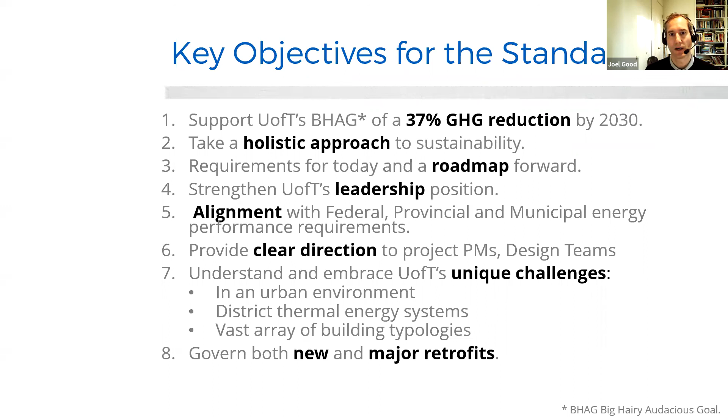And also maybe the most complicated part of it all is that we have, with the 3 campuses, with the size of the University of Toronto, a vast array of building typologies. So we're not talking about just lab buildings here, obviously. And we needed to govern both new and major retrofits. So it's not just for new construction, but also for the existing building stock. And I'll show you a little bit about that now.

So here's a breakdown roughly of the archetypes by floor area that we're talking about across the campus. So you can see that we're predominantly in admin and academic buildings up to almost 600,000 square meters. But when you look at wet labs and dry labs, making up another almost the same amount, right? Or maybe even a little bit more, up to 600,000 square meters of existing lab space already on campus. So this is a highly focused research university, as many of you know, and as such, there's a lot of lab space.

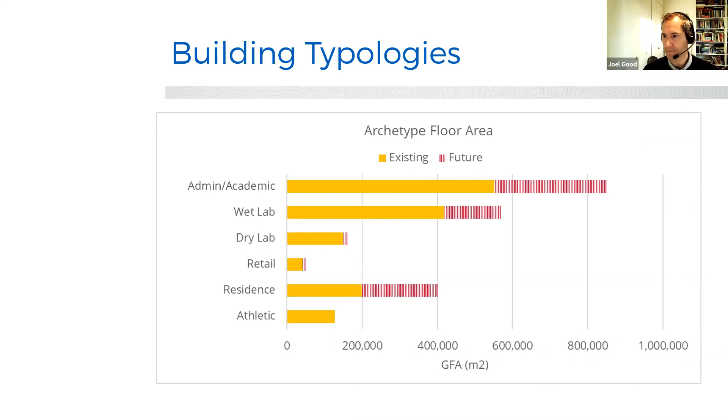Here you can also see in red the future planning. So significant growth planned over the next 10 years, which is our target. Kind of target timeline was out to 2030, as I mentioned before. So big growth in academic wet labs and residences.

So how do we get there? So it's like any journey, it's one foot in front of the other. So step by step. The first thing we wanted to do was establish some context and benchmarks to the energy. So like I mentioned, let's look around at what else we need to fulfill as far as federal, municipal, local requirements, and then come up with a set of goals and metrics that would meet those overall goals that I just discussed with you.

We wanted also to be very clear about investigating a set of performance pathways. So we don't want to just come up with some pie in the sky metrics, some that we have really no way of helping design teams achieve. So we wanted to come up with a series of performance pathways that would show a roadmap, basically, for design teams on how to achieve these goals. So we got very specific in that, and I'll share some of that work with you.

Okay, so first of all, the context. So some governing codes, as I've mentioned: the local codes that do govern are the Toronto Green Standard. There's buildings on campus that are going after LEED requirements, so obviously there's energy requirements and credits available for LEED. On campus, there's also pursuit of the CAGBC's zero carbon standard.

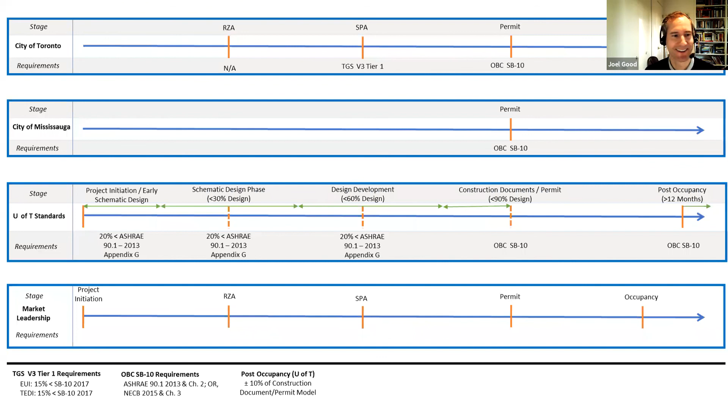And so we aligned a lot of these different timelines for the different submissions, just to see what it is that design teams are currently working towards, and what are their challenges, and then how we could line up and look for synergies across these to simplify the process when it came to our own energy requirements. I won't dwell too much on that. It's a bit of a tricky one to figure out.

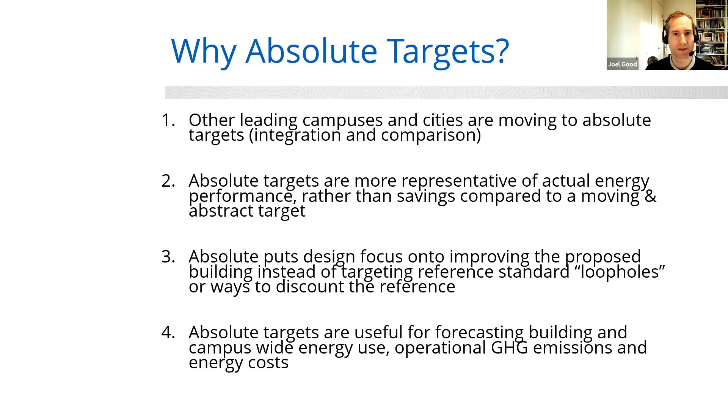So why is a relative target challenging at high performance? So this is kind of the flip side of that. So like I mentioned, the high performance proposed mechanical systems are compared to high performance reference systems. So things can show up on one project. So a VRF DOAS system can look 45% better than the LEED reference building, but only result in a 15% cost reduction. So when you're targeting LEED, which does refer to energy costs, it starts to complicate the issue, and the decisions aren't always being made for pure energy and carbon reasons. There are obviously reasons why costs should be brought in, but we wanted these targets to focus specifically on energy and carbon goals. Otherwise, we weren't going to be able to make that 37% by 2030, which was really the ultimate target here.

There's also limits on what energy conservation measures can be used for relative savings. So reducing domestic hot water usage is not an allowable conservation strategy. So when you're comparing against a reference building, the usage needs to be the same, or the way the building is used. So we also wanted to encourage the designers and the occupants and users of buildings to be able to incorporate reduction strategies too. And so we wanted those to be rewarded in the ultimate metrics too. No credit for Energy Star or high efficiency receptacle equipment. And as we know, and I'll show you a little bit later in some of our modeling results, labs have very high receptacle equipment loads. And so that was something we wanted to be able to also take credit for and show performance for.

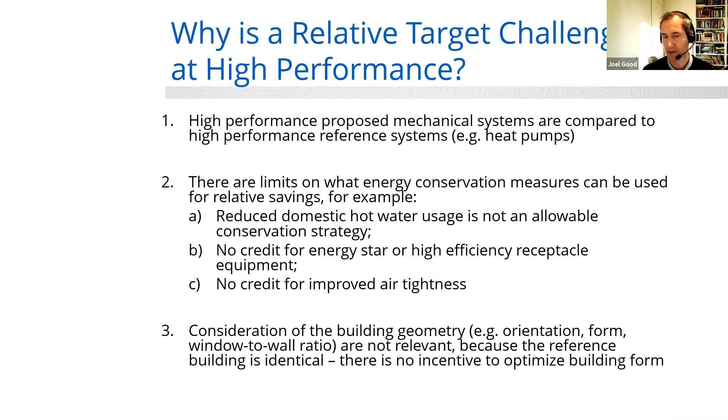No credit for improved air tightness too when you do a comparison like that. Often the reference building would be the same as the proposed building in those cases. So we wanted also airtight buildings to be rewarded as well. So the final one there is consideration of the building geometry. So when you create a reference building, you use the same shape of building. So you don't get benefit for choosing a building that's optimally oriented or optimally sized and geometry chosen for passive solar gains and that sort of thing. So we wanted also to take credit for that.

So looking back at that early concept work, we came up with a series of target metrics, and the target metrics that we chose for energy, these are mandatory metrics. We also came up with a series of what we called reported values, which were set to better establish current practices and performance, but were not meant to be mandatory yet. We just want to be tracking this information so that we can start to implement those in later stages.

So the mandatory requirements were, there's some kind of common ones here that you'll recognize: the energy use intensity, the greenhouse gas intensity, the heating TEDI or thermal energy demand intensity, and then we also incorporated a cooling thermal energy demand intensity too. The reported values that we were tracking are the enclosure R value, so an overall R value including all thermal breaks, and a whole building air tightness. We really want to be pushing buildings, new construction in particular, to be building with a consideration for a tight envelope.

And here's a quick look at what those metrics are like. We're not going to spend too much time. Hopefully you have an understanding of these, but basically the total energy use intensity, the TEUI, is the total site energy use over the floor area of the space. So it's kilowatt hours per square meter per year. Similarly, for the greenhouse gas intensity, it's the energy use times emissions factors based on what kind of source energy we're talking about: electricity, natural gas, etc.

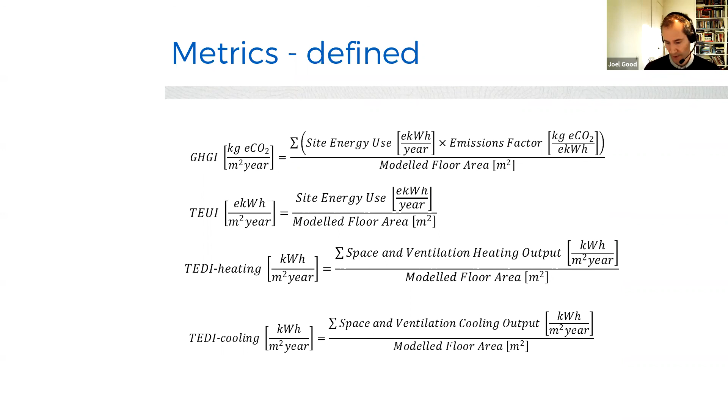And then the TEDI, the thermal energy demand intensity, is the summation of all the space and ventilation heating output. So just the heating requirements over the floor area. And then similarly, the cooling one is the ventilation cooling output over the modeled floor area. So those were our key metrics that were mandatory and targeted.

So we had the starting point, our baseline year, 1990. We have all the historical and current energy carbon performance of the campus, and we have a new construction goal set by the campus of 37% better. So we now know what we need to achieve, what we need to reduce. Here you can see new construction. There's no numbers here, obviously, but you can see relative sizing. We can see a target EUI that we needed to get to, and we knew that there was a gap that we needed to reduce. But most of the carbon is in the existing buildings.

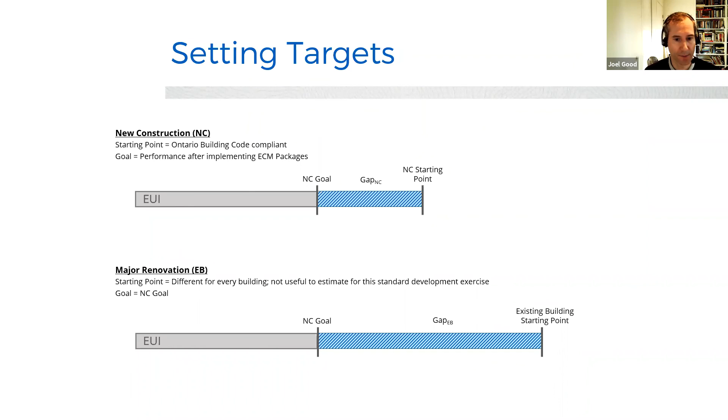So here are a series of models that we created to test our pathways to energy performance. We wanted to avoid using generic boxes in this exercise. So often when we're at this stage of planning, you'll just start to use basically cubes or simple box models, as they're called. But we wanted to capture some of the nuances of functional buildings on the campus. So therefore, we went through and picked some average, typical styles of buildings on the campus

and modeled those explicitly. So these buildings, the 6 archetypes you see here, each have a combination of uses similar to in real life. So there's no one building on campus that's just an admin building. They have other functions as well. Same with some of the lab buildings. There's always office space. There's always some other research work being done in them. And so we wanted to capture the nuances of that. And so we used real buildings, and you might recognize some of these structures.

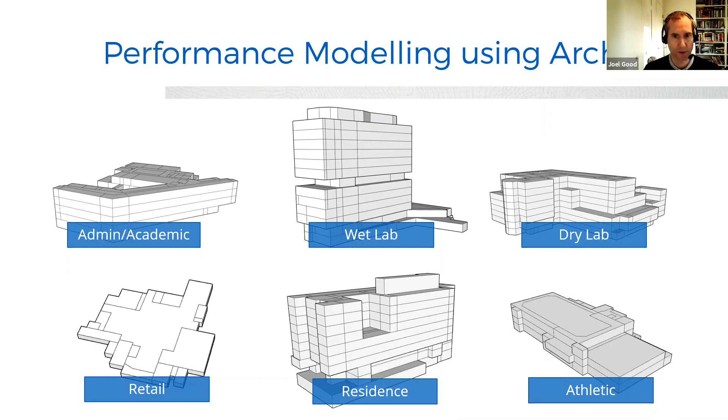So this is maybe a good point to talk about a nuance here between the lab buildings that we modeled. Wet labs are labs that have high air changes, basically are driven by air changes. So these are medicine, chemistry labs that have fume hoods and, like I said, are driven by air change. Whereas the dry lab buildings are really driven by equipment loads. So these are engineering, computer science, that sort of research lab, which are not so much driven by the air changes, more so by the electricity consumption.

And here's some of the early archetype decisions that we built into the models. So here you can see an example of the wet lab archetype. On the right, you can see the pie of the space breakdown, and this shows you that even a wet lab building is a third laboratory space, 14% lab support, a bit of office, some multi-purpose, corridors, stairs, storage. So what we wanted to do here is to have an honest representation of what we feel a lab building is and what they plan to be for the future. As many of you know, there's all sorts of flexibility in space design, and we wanted that to be represented in the models.

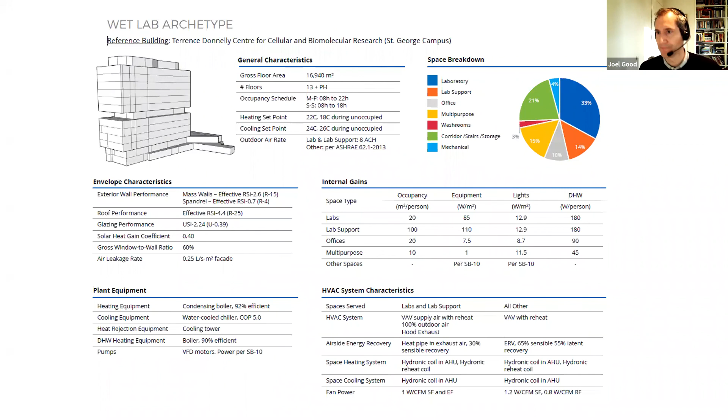And you can see here, I'm not going to go through every input we put in, and this isn't by any means all the input, but this was our first step at creating a baseline or typical University of Toronto wet lab. Pardon me. And here's an example of a dry lab building. So similar sort of breakdown into space types, maybe a little bit more on the office side here, but similar space usage, set points, and that sort of thing.

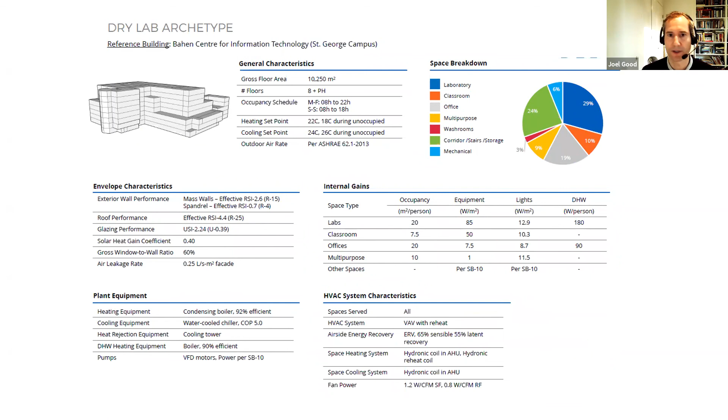So here is our first look at some energy output. So this was the first take at running each of those archetype models. You can see that the 2 labs I showed you are number 2 and 3 in the columns there, but we ran it for each of the building archetypes, trying to come up with something that was roughly code compliant and still tracking our key metrics. So you can see there that we have our total EUI in bold.

I'm not sure if my mouse shows up, but we're starting to get EUI numbers for typical buildings, and you can see, as expected, some of our high air change spaces, like the wet lab, have high EUIs. When you look at the energy performance, you can see that there's a lot of space heating required with those air changes, and a lot more fan power associated with those buildings too. We also tracked, as well as the EUI, the greenhouse gas intensity here, using emission factors local to the campuses, and some of the TEDI heating and cooling as well. These were our voluntary metrics, but we wanted to make sure that we were capturing those too.

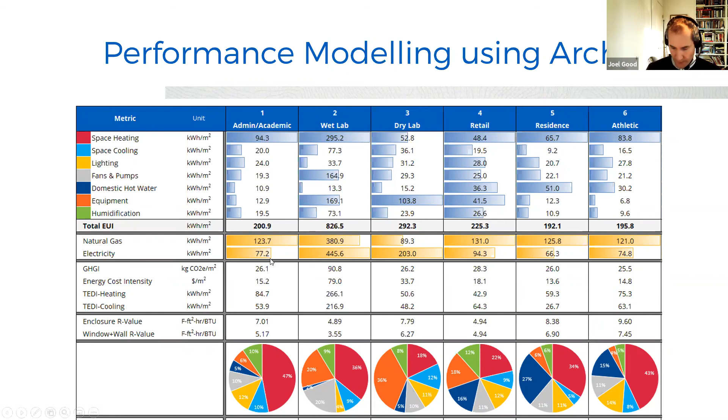So what we came up with was we now have the tools basically in place with these archetype models to forecast a plan. So as I showed you before, we knew where our baseline was. We know where we need to get to. And so it's just a matter of plotting the course. And so we wanted to set up a series of steps to get there. You can see the X, Y, and Z here, yellow, blue, and orange, are different categorizations of design choices or retrofit choices for existing buildings. So we wanted to come up with a package of mitigation measures that would help us step towards that goal, that EUI goal.

We packaged those as being a low intensity retrofit, which might be an interior renovation, things like lighting changes, that sort of thing. A mid-level retrofit would be something that really got into tackling the HVAC and mechanical systems of a space. And then a high retrofit would be all those, but also one in which the envelope was also included. So we might be changing our R values and window types and things like that.

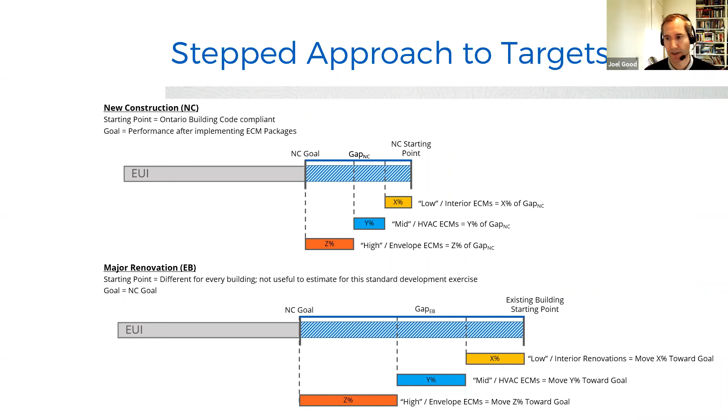Whereas a mid-level design change would be something that maybe included water side economizers, electronically commutated pump motors, EC motors, ERV or energy recovery ventilators on the exhaust, variable frequency drives, DDC building controls, and perhaps VRF systems too. So that would be indicative of what a mid-level design retrofit or new construction design package would look like.

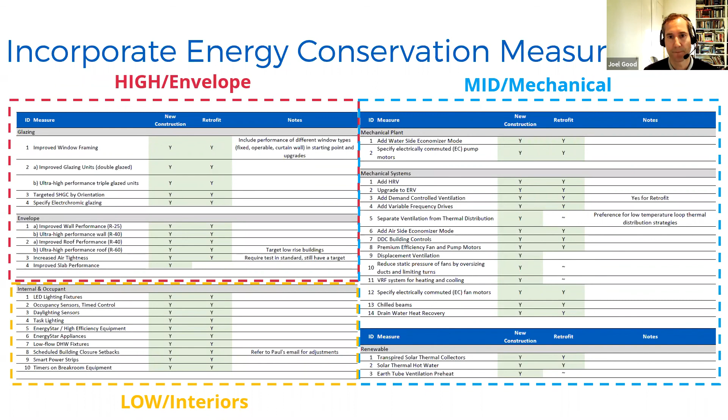And as I mentioned, a high one would be improved wall R values, improving the glazing. So maybe going from double to triple glazed envelope. And then also increasing air tightness too. So looking at really reducing the amount of air that's leaking out of a building and decreasing our air changes in the spaces too.

So we then took our models, as you'd imagine, and implemented these ECM packages throughout. So here's a first pass at those target results. And you can see here that we have a starting point and then a target. With this, we were now able to compare to other codes and look at how we were aligning with some of the TGS standard and the zero carbon standard and that sort of thing, and figure out how well our buildings with these new energy conservation measures were performing.

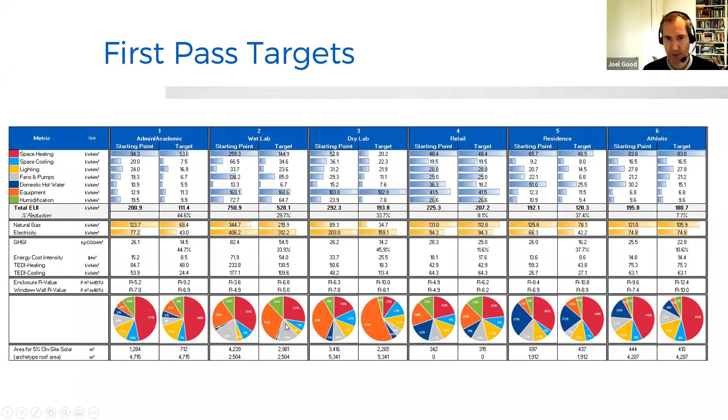As we all know, labs are unique, which is why obviously we're all here today trying to figure out ways of doing that. So this was really our struggle, bringing down the energy consumption in our wet labs in particular, dry labs also. But you can see when you look at the energy pie down here for a wet lab, for example, that there's a big shift when we get into instituting our energy conservation measures, and I'll talk a little bit more about that right now.

So this is what we learned about wet labs in this process: obviously outdoor air and receptacles are critical to this archetype, in particular the air changes. We can get to significant energy savings just with instituting night setbacks and DCV fume hood systems. So the good news is that if you can tackle those air changes, you can make significant savings when it comes to energy for a wet lab.

And you can see that shift here in the energy pies, where the orange here is the equipment. So we were able to greatly reduce space heating from 35 to 27%. We're similarly able to reduce cooling a bit. And as you do that, the hard one is the equipment load just doesn't change, and so it becomes a bigger part of this reduced pie here.

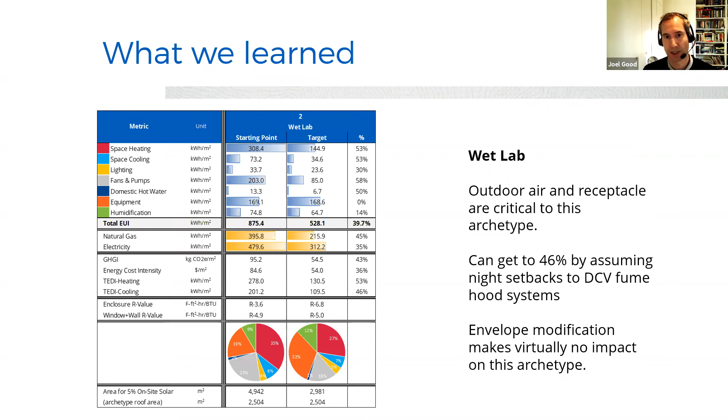And the other thing we learned about this is that envelope modification really makes virtually no impact on this archetype. Because it's so governed by air changes, changes to the envelope, looking at improved R values, really was a bit of a drop in the bucket when it came to trying to move that needle on energy consumption of these spaces.

Similarly for dry lab, this one is equipment dominated even more so. You can see that in the orange pieces of the pie here, but the cooling is more because of the higher internal loads in these spaces. So receptacle is really critical to this archetype. Again, envelope modification makes virtually no impact.

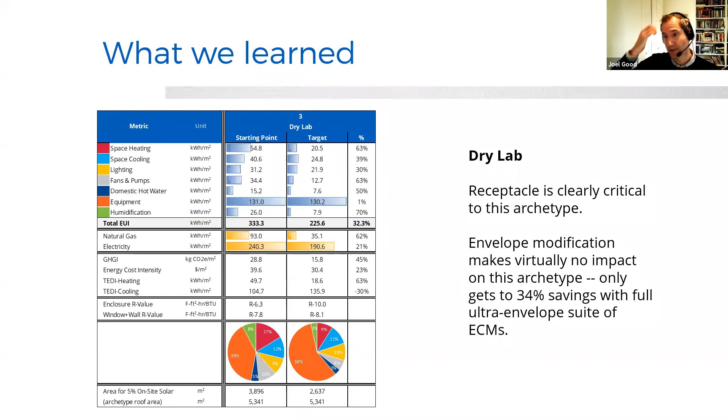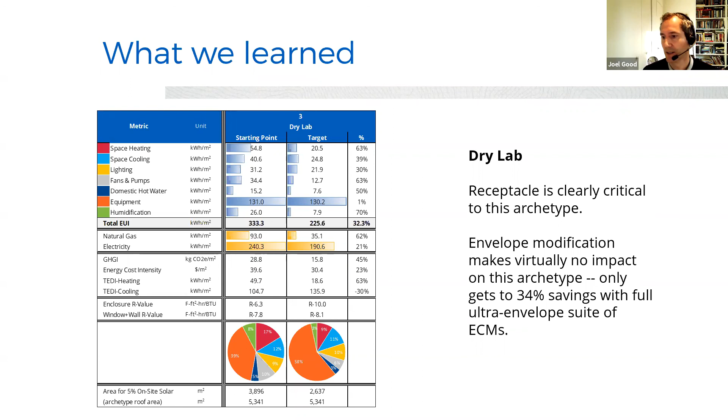And you really only get to 34% energy savings with the full ultra envelope suite of ECMs. So it really doesn't push that needle as far as it needs to go. So for these ones, we've instituted all these mechanical, electrical and lighting savings, but we really need to start to tackle that receptacle use.

So now, because we have each of these energy targets and we've run through the models, we were able to compare to some of these other codes and standards. What we found is that the admin academic buildings, so basically an office type, and the residential buildings, similar to the MURBs, align very well with a TGS Tier 3. We wanted to get to at least a Tier 3 when it came to these guidelines, so we were happy with that. Our performance looked like we're getting there with these measures, these packages that were instituted.

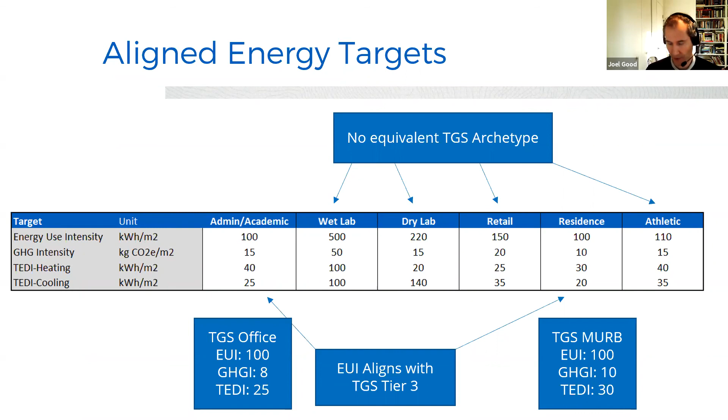But we really had a lot of trouble when it came to trying to compare the labs and athletic buildings to any kind of TGS archetype. It just didn't exist. So we weren't able to get the kind of confidence that we had in those other building types, that we were really being successful at moving those to a high performance standard. So really the way to do that was to look at our overall goals in the space, and that's what I'll talk about here. So we'll spend a little bit of time on this.

We spent a lot of time with this sort of graphic. This is where we were able to see how well we were going to get to that target. So that 1990 baseline, or sorry, this is in tons of equivalent CO2, so our projected GHG emissions. The 1990 levels were known, you can see on the left-hand side there, and the 37% reduction is the black dotted line that runs across below that.

You can see the campus had already, even with the growth between 1990 and 2018, started the reduction process of GHGs. So they were on the right path, even with the growth, but not at that kind of pace. They weren't going to be achieving the 37% reduction by 2030. So that's obviously why we came in to help set these metrics.

If building as usual continued until 2030 with the increase in building square footage, we would see a rise in the GHG emissions up to 160,000. So if we didn't do anything and kept on building buildings basically to code standard, we were going to see a significant rise over the next 10 years or so.

But the LCAP, or the Low Carbon Action Plan at the campus, had already started to address some of this. There are some initiatives I mentioned earlier, transferring to district energy systems and geo-exchange, so that would be a significant reduction to GHG emissions. We had the advantage of being able to piggyback off of those decisions. There were also some recommendations around this gray, the other LCAP reductions, which would be things like solar energy. So there's going to be some renewable energy on campus, and other decisions like that were going to help reduce our consumption below those 2018 standards, just by following those standards.

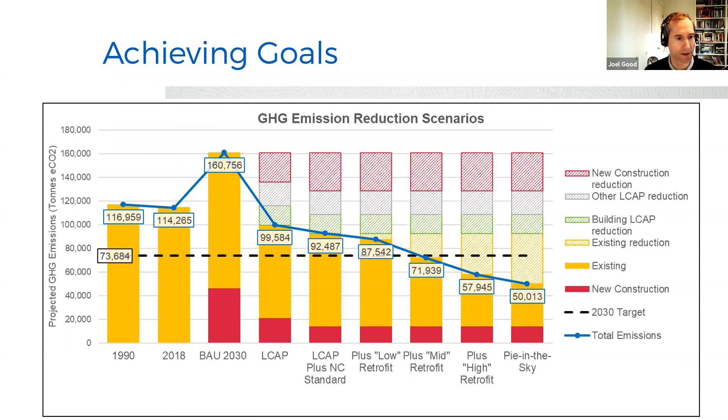So this was a constantly evolving graphic that the team worked with often. So currently implementation is ongoing. The focus today is on energy and carbon, which were significant, like I mentioned, but we also made water, waste, and materials implementations too that went into the energy performance and modeling standard.

The new construction was relatively straightforward. We could institute those using recommendations very similar to existing code, but the existing building was more challenging. Our approach for that was to give two compliance pathways: a minor renovation, so a tenant fit-out, and a major renovation. Any retrofit deemed minor must meet the prescriptive requirements included in the code. And any major renovation must meet a % reduction based on what elements are being upgraded, so low interior, mid, or high envelope reductions.

And so to help the campus make those kinds of decisions, we implemented what was called a project charter. If an existing building was coming up for retrofit, it was a way of selecting the amount of energy reduction required in that retrofit. So based on the different space types of that existing building, we were able to make projections that matched the work we did with the energy models to come up with a targeted energy target for each building, unique to that building based on its space usage. So whether it had 20% office and 80% lab or whatever it was, there would be a set of targets unique to that building that would be used in this calculator, or the project charter.